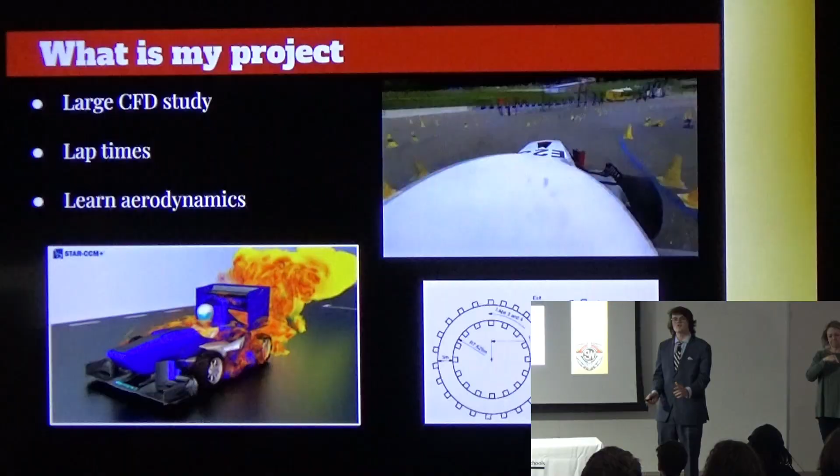A skid pad event is a simple figure 8 event where you take the track time of going around this figure 8 twice, and see what is your best time going around a circle 1 time. You average it out, and the best time is your overall score. That is what I'm going to be accomplishing.

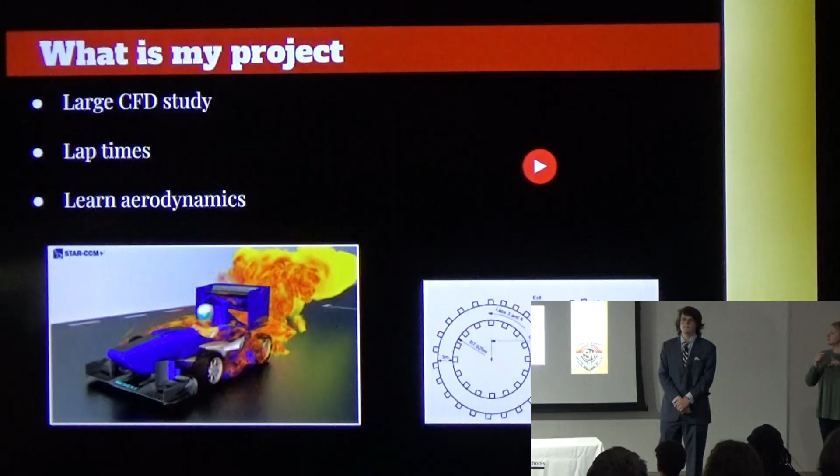And finally, I would also like to learn quite a bit about aerodynamics, as one of my goals in life is to become an aerodynamicist.

So, what are my project inspirations? What really inspired me to do this? Well, I've always loved racing, and I've always kind of been curious about aerodynamics myself. In fact, my car has a spoiler on it, and I've always kind of thought, how does that even work?

Learning aerodynamics kind of came naturally to me because I see it all around me, and I've always wondered how it worked. Secondly, I always wanted to join an FSAE. Now when I say always, I don't mean like Kyra, where he was 18 months old when he got into NASCAR.

I mean more like during high school. I've wanted to join an FSAE team since I started high school, as it is one of the best introductions into racing that you can get. So that's my second project inspiration.

Finally, most importantly, is being told not to by Mrs Lujan. I remember vividly walking out of my junior year on the final day and explaining to Mrs Lujan how I'm super excited to do a senior capstone project.

To which she asked, well, what do you want to do for your senior capstone? And I told her I wanted to make a go-kart. Well, this isn't quite a go-kart, but it's quite similar, and here we are.

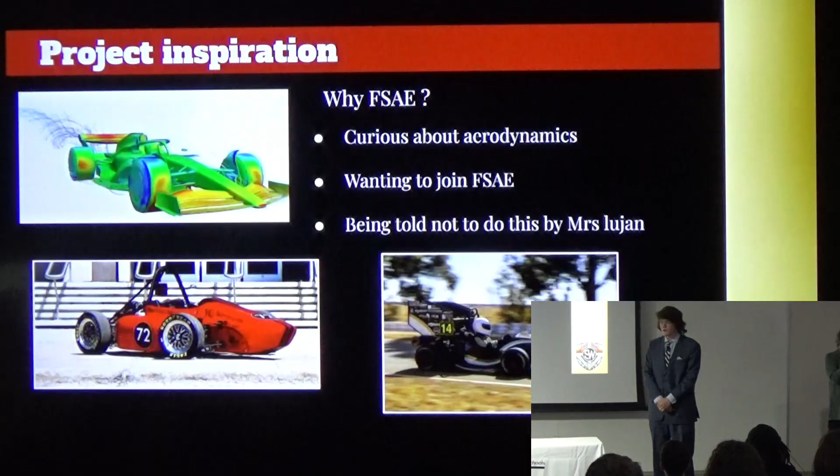So, another thing that's important to cover is exactly the engineering required to make something like this. I must cover these bases because it's important to know what you need to become to make accurate models for this. What you basically need to be to create an FSAE car is an aerodynamicist.

Unfortunately, I am not one. But what even is an aerodynamicist? An aerodynamicist is someone who studies the movement of air, the flow of air over objects. This could be trains, planes, boats, even buildings sometimes. The qualifications to become an aerodynamicist effectively sum up to being either a mechanical engineer or an aerospace engineer. Of course, you can be other forms of engineering, but these are the two most common.

Oftentimes you'd also find these guys in the wild working on pretty much anything racing. These guys love racing. However, there are quite a few aerodynamicists who work outside the field of racing, as we need aerodynamics for pretty much anything that moves.

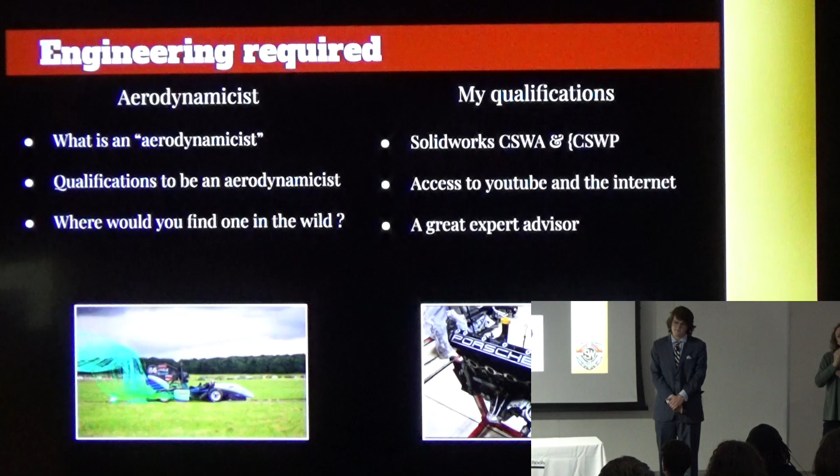Again, I am not an aerodynamicist, unfortunately. However, I do have some experience that allows me to get into this project. My first and most important being, I know SolidWorks pretty well. My SolidWorks experience allows me to model anything I need to model for this project.

Secondly, the most successful part is being able to access the internet and YouTube for my project. This has been crucial, as it's taught me basically everything I need to know, because unfortunately I don't have the money to hire my own tutoring team teaching aerodynamics. And finally, having a great advisor has been a massive help to this project.

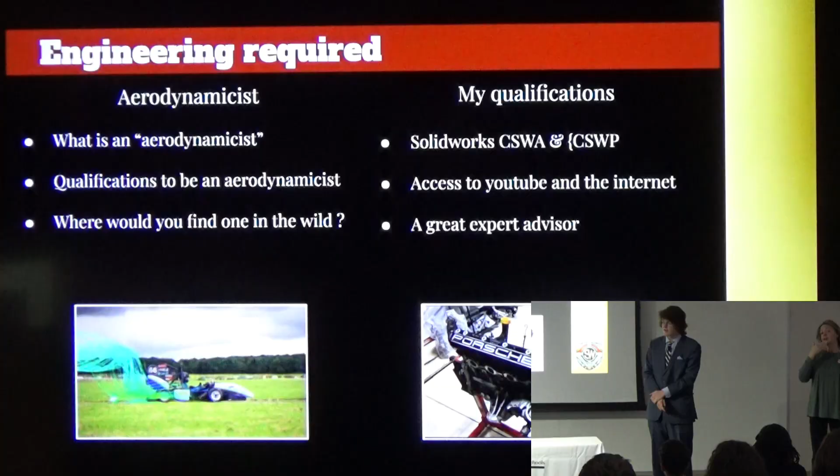So, to get through a final thing, my project objectives. Before we get into the actual project, I must go over what were my initial goals for this project. For starters, I wanted to create a full-scale FSAE.

I wanted to design something of my own rather than just taking a random race car off the internet, which was first what I was told to do. I would like to make it my own, to test it on my own terms.

Secondly, I'd like to kind of understand aerodynamics as it is. I'd like to get myself into the field of aerodynamics and really just have a grasp of it. I'd also like to use these aerodynamic connections to make connections with FSAE members.

Now, most FSAE teams you can just join without needing a requirement. However, the more connections I can make, the better, as it might be able to get me into maybe Formula 1 or Formula 2. Also, I would like to improve my skills with SolidWorks.

As Colton probably remembers, my skills starting off the year were pretty rusty. However, this project has helped me revitalize anything I've learned from SolidWorks and taught me quite a few new things about the program that I didn't know.

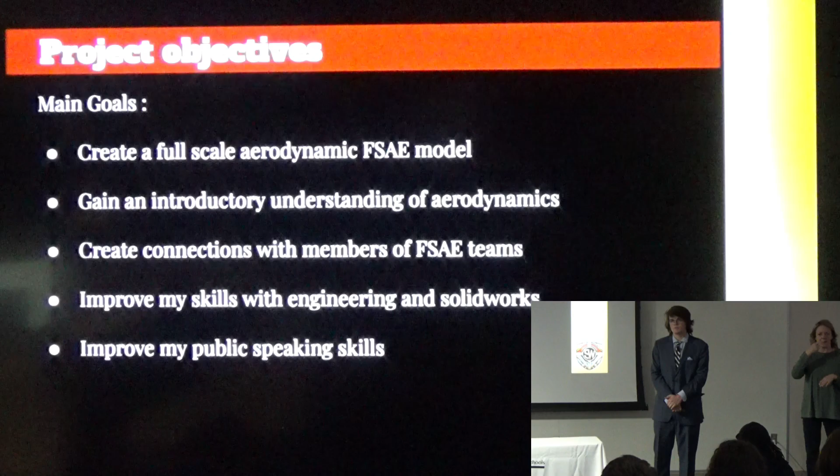Finally, I'd like to improve my public speaking skills. My public speaking skills, like some of the other guys mentioned, have been pretty lackluster. However, here we are, here we're doing it now.

Alright, so before we actually get into the main bulk of my project, I'd like to give you guys a little bit of a crash course on aerodynamics. Now, of course, I can't teach you everything about aerodynamics, but I can teach you the simple basics to help you understand my project better.

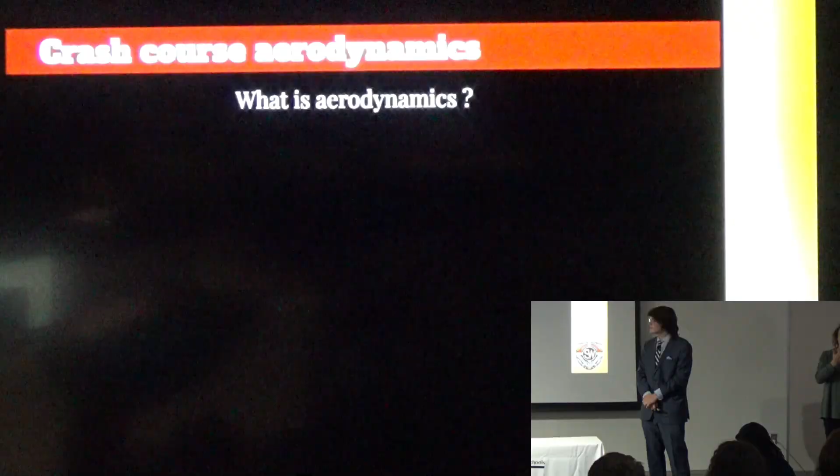These three simple basics I will be covering are the study of airflow, the principles behind this, and finally the effects behind the principles. So, starting with the study of airflow: what even is the study of airflow? As the name implies, it's the study of moving air.

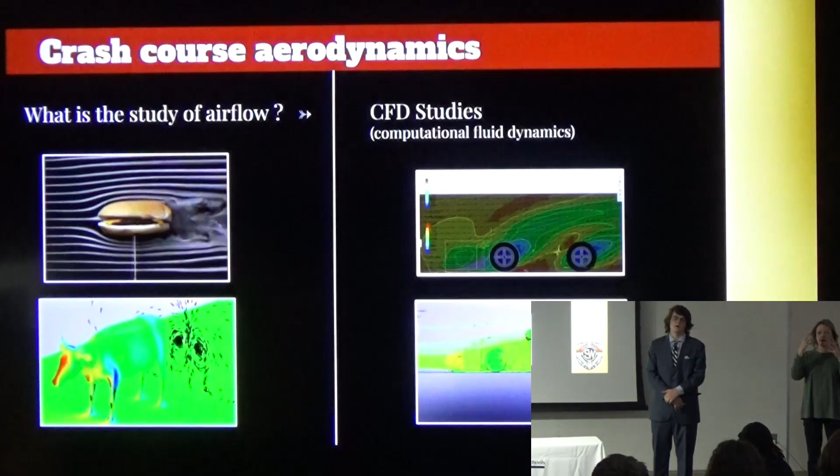Luckily, we are in modern times where we're able to use CFDs, where we're able to calculate all our airflow over computers. However, in older times, they would commonly use smoke airflow tests, and they would have to do lots and lots of math. We're in modern times, so I was luckily able to save myself some time not doing it.

Secondly, the principles. We're going to start with Bernoulli's principle, as it's probably the most important for this program. Bernoulli's principle essentially establishes that air is pressurized.

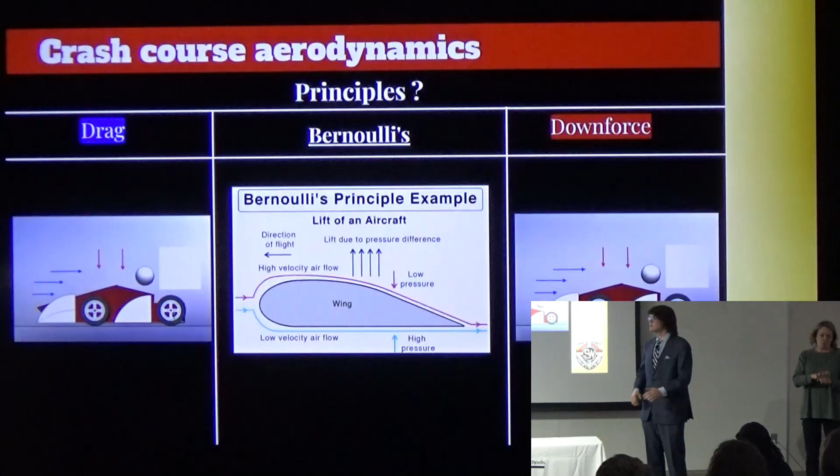We know that air likes to move around on top of and below objects. So, by using this, we can establish what creates lift and what creates downforce. The best way to think about it is air likes to stay at a constant state. If you increase the pressure of the air, well, it will push back on you.

And if you decrease the pressure of the air, it would like to pull back on that as the rest of the air tries to flood it. Using this understanding, we can create a simple wing, where low pressure pulls up on the wing, and high pressure pushes up from the bottom.

Flip this upside down, and you have downforce. Downforce is effectively lift, but upside down. Downforce is another subsidiary of Bernoulli's principle, and so is drag, which is why Bernoulli's principle is very important. Drag is effectively a perpendicular force of downforce. If we know what downforce is, we can know what drag is. Drag is like downforce, except it comes from the front and pulls from the back.

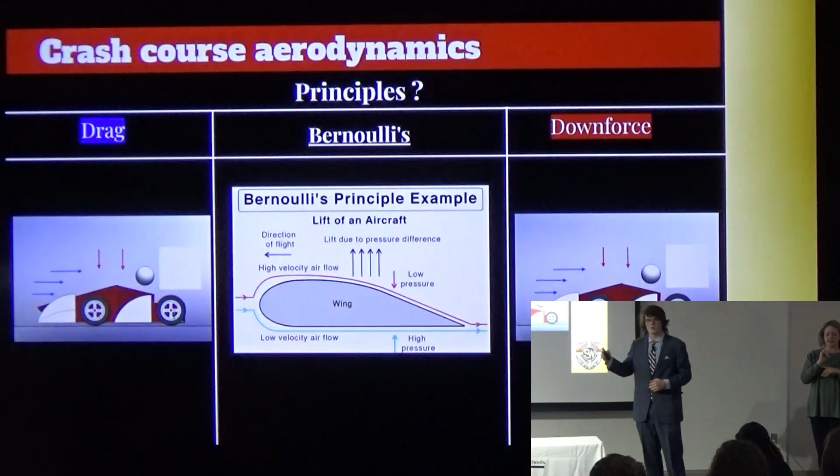Finally, we have our effects. Of course, there's plenty of effects to go over, but the three main effects I'd like you guys to know are the Coanda, Venturi, and ground effect. For starters, the Coanda effect basically establishes that air likes to stick with itself. It likes to be with its friends and kind of stay in a steady layer with itself.

So we know that if you put a wing through the air, rather than the air flinging off the wing like it's going off a ramp, it likes to go over the surface of the wing and hug that wing.

Second, we have the Venturi effect. The Venturi effect is only utilized a few times. However, it's important to know that the Venturi effect is what happens whenever you squeeze air into a tight space. Think of it like when you were a kid and you put your thumb over the end of the hose. The water would go super fast out of the hose because as you squeeze, the pressure decreases and the velocity increases. That is the Venturi effect.

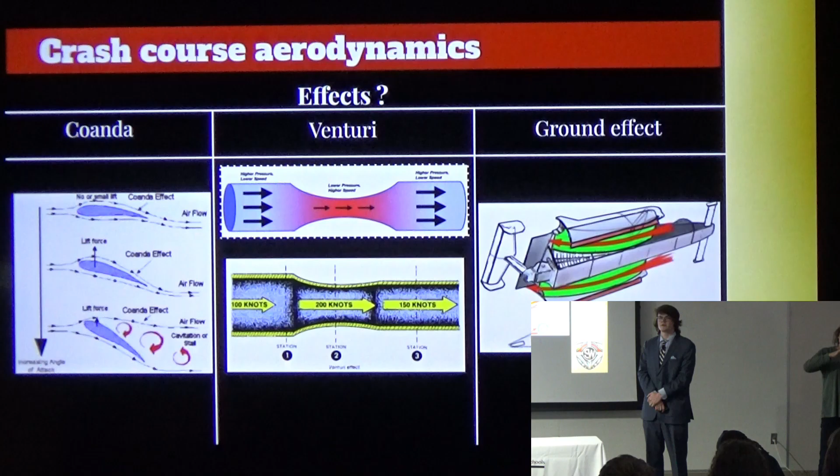And finally, the ground effect. Not to be mistaken with the airplane ground effect, the race car ground effect essentially combines both the Coanda effect and the Venturi effect. We know that if we can get the air moving fast and squeeze it together and then rapidly remove it from the bottom of the car, it will create a low pressure area, which will suck the car to the ground, allowing the car to have much better downforce. Effectively, we're trying to create a vacuum below the car.

Finally, one little quick tidbit I'd like you guys to know is a bit of slang, as I'll be using some of these terms. Our first word is wings. It's important to know this is a wing. This is not a wing. This is a spoiler. What a wing does is it actively works to create downforce, whereas a spoiler actively works to go against lift. So it's important to know this is a wing, that's not.

Second, track/wheelbase. For all intents and purposes for the rest of this project, just assume this is length and width of the car. And finally, aero package. Aero package simply means the wings and body of the car. It's anything that generates downforce.

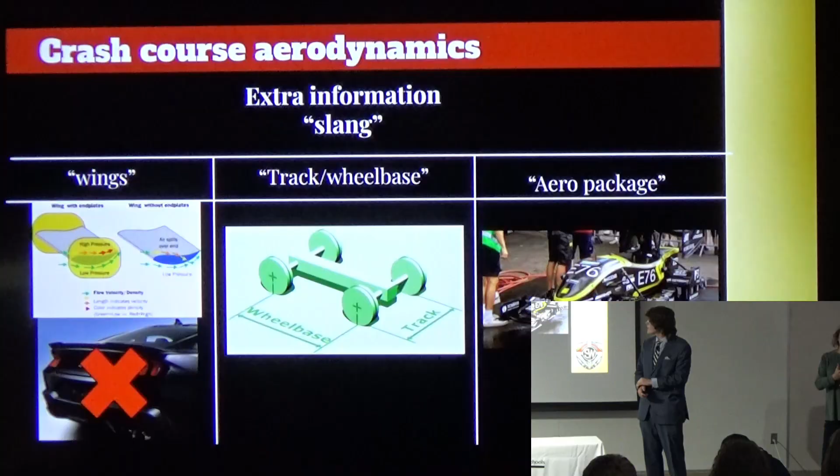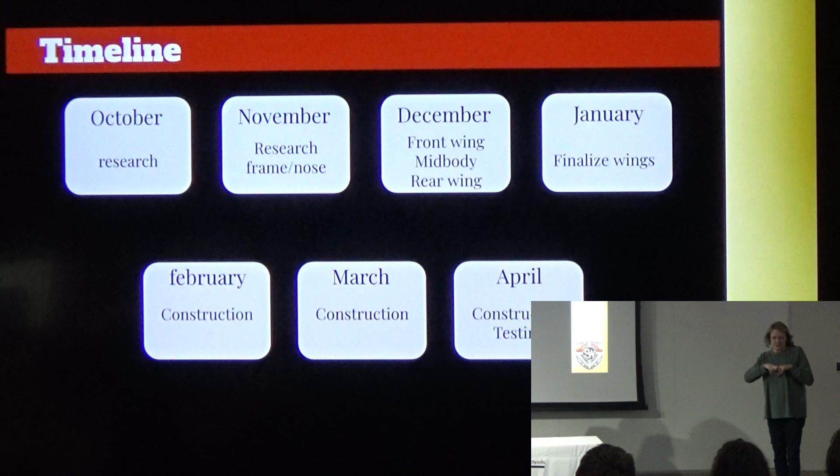Moving on to the beginning of my project, I'd like to introduce you guys to my lovely initial timeline. I was quite overambitious creating this timeline, and I decided I was going to make a full-scale model, which, unfortunately, I never ended up making. As you guys can tell, I probably wouldn't be able to fit inside this model.

However, I did end up beginning with my research, but we will come back to this, as it essentially establishes what I began with the 3D modeling and then finished with construction. To get us through this, I'm going to go ahead and add a timeline on the side. This way you can see the progression of time as I go through my project.

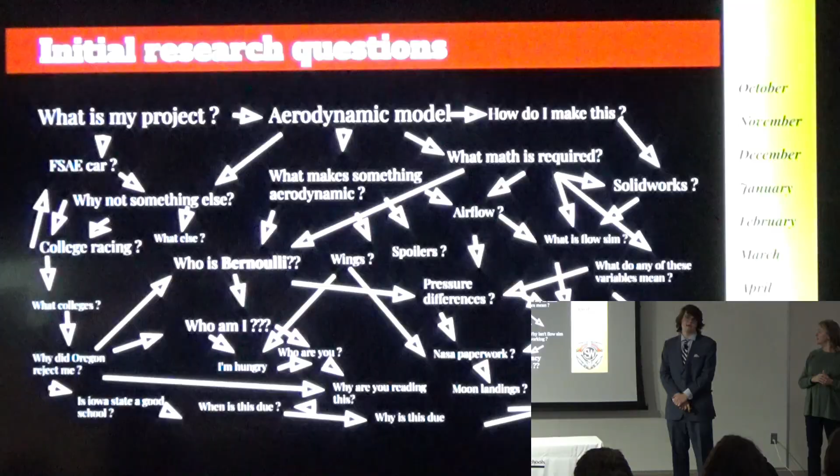Starting off, what is my research for this project? Research is important to know, and research is important to do for this project. However, as I got into the research, I found it to be a little confusing. It got kind of complicated kind of fast. Aerodynamics is a much more complex field than I ever thought it would be. So I went ahead and simplified a few things.

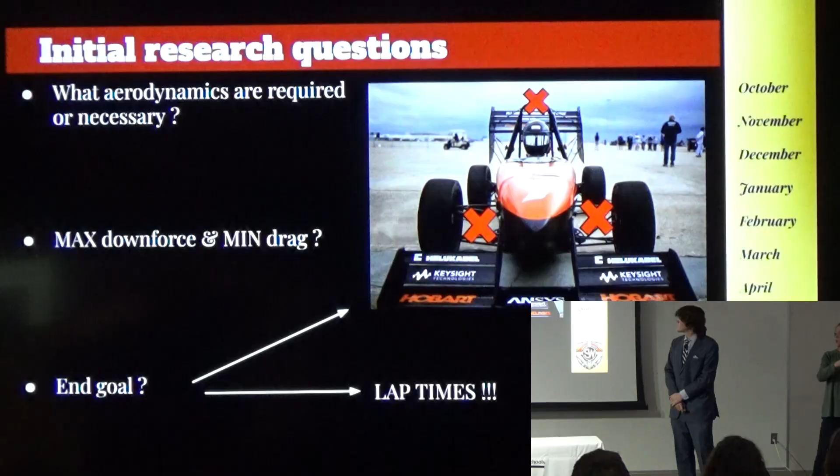I decided my three main questions to ask myself for research are: what are the required aerodynamics, and what is necessary for this car? Some of the required aerodynamics are simply just for wings. We know with the wings we can generate downforce and all the forces required to study it. However, some of the non-required stuff, such as the steering columns, the suspension, and other outboard components, do not generate downforce, unfortunately. However, they do create a lot of drag, and they do waste a lot of time 3D modeling.

To save myself some time modeling and generating, we're going to look at max downforce with min drag. Of course, the most important part of figuring out this project is figuring out how much downforce my car could produce.

Unfortunately, I can't just make a wing that creates thousands of newtons of downforce, because that would result in a lot of drag, and the car would end up being slow anyways. So I need to find a nice little medium between it.

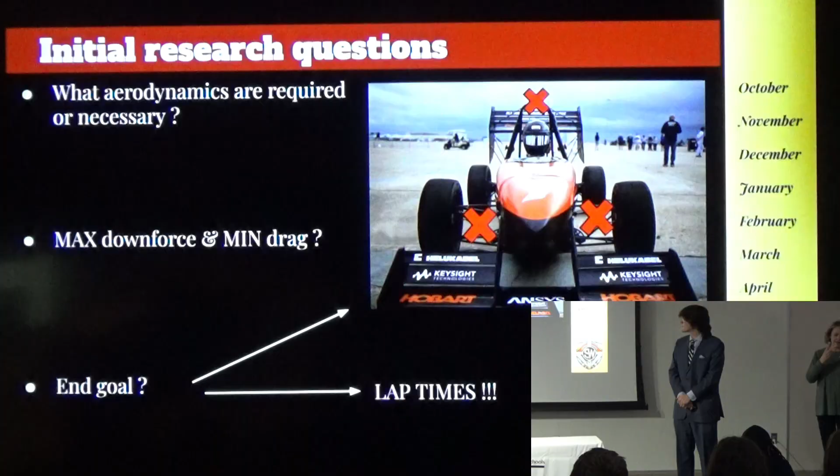And finally, what is the end goal? Well, as described earlier, my end goal is to make a full-scale FSAE model and calculate the lap times behind it. That ended up taking a month off my time, so we're still pretty on track.

Secondly, I decided to start with some bare-bone basics. If I'm going to get this project started and create some 3D modeling for this project, I might as well do some basic stuff. So I started with a simple shell, doing the wheelbase, and doing a regulation layout — the layout required by FSAE within their rule book, just laying out where stuff needs to be.

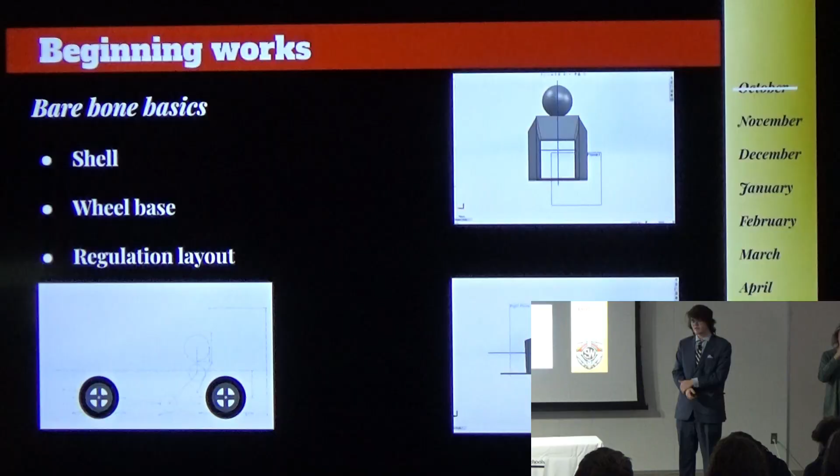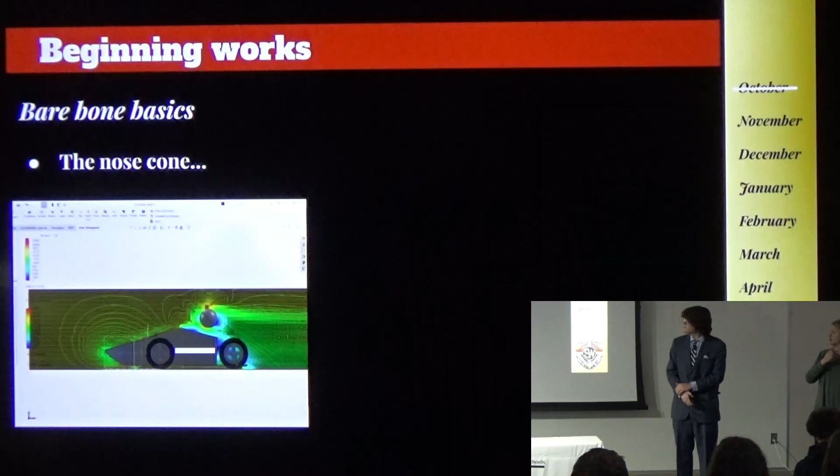Then I decided, since I'm ahead of time, I might as well start on some aerodynamic devices. The first aerodynamic device I started with, I thought would be the simplest. Unfortunately, it was not. The nose cone ended up being one of the most complex aerodynamic devices I've built, because I really didn't know what I was doing when I was creating it.

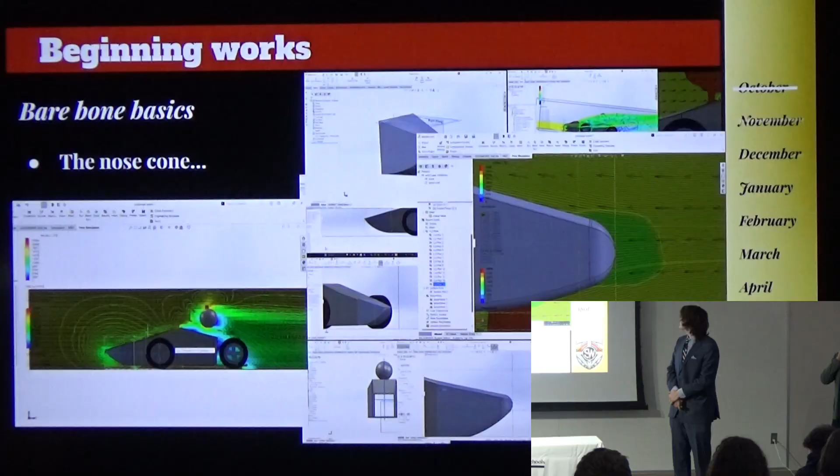The way I decided to create it was, instead of doing a simple model and correcting the issues with it, I decided to create roughly 20 models and see if I could just make a model that would be perfect off the cuff. Granted, this didn't work at all, and this chewed into another 2 months of my time.

So I finally found a nose cone that did actually fit my project, and I thought it looked pretty great. In fact, I had quite a few people look at it and say that would work, and some of my advisors thought it would work too.

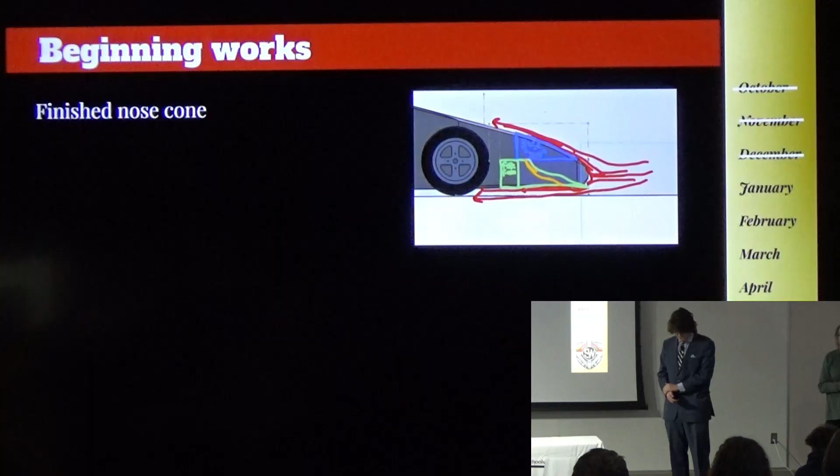However, I went back through all my research, and it turns out this nose cone would be more effective upside down. Really unfortunate. So I went back to the drawing board and created yet another nose cone — the lovely nose cone Mark 20. This ate another month of my time.

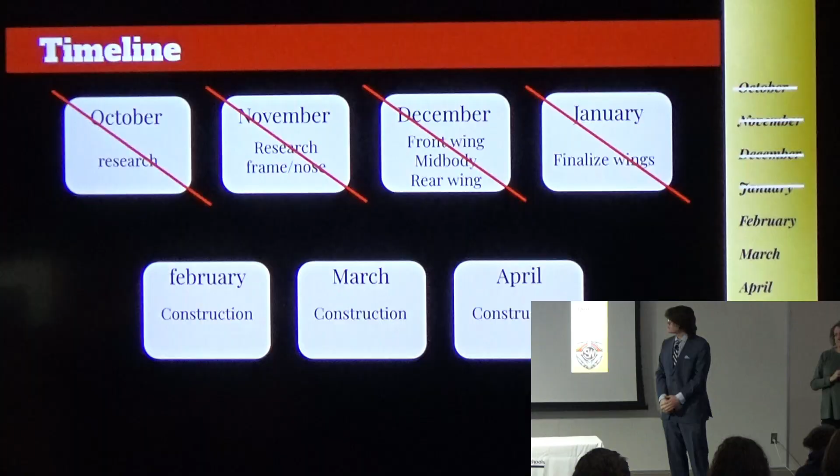So I had to go back and re-look at my timeline, because by this point I had gone through 4 months of my timeline, and I'd only really covered 2. So I was way off track, and I needed to reissue how I would do my project from now on.

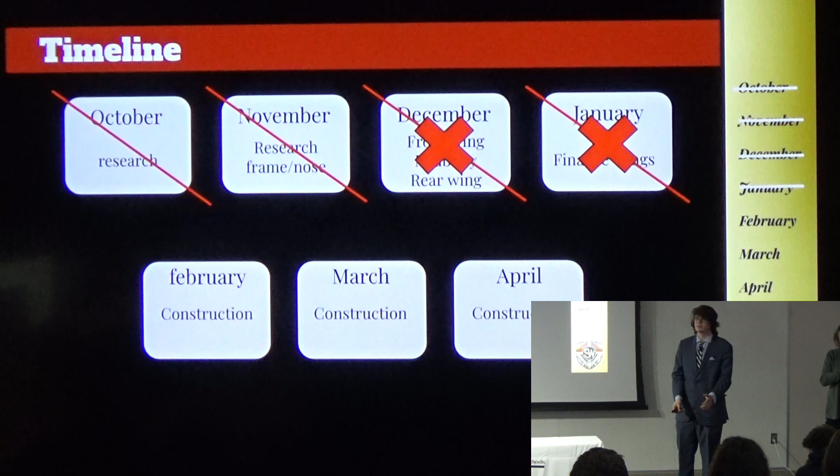So moving forward, I decided to get rid of the construction and instead focus solely on 3D modeling and lap times, as having a physical model is not nearly as important as having a working model.

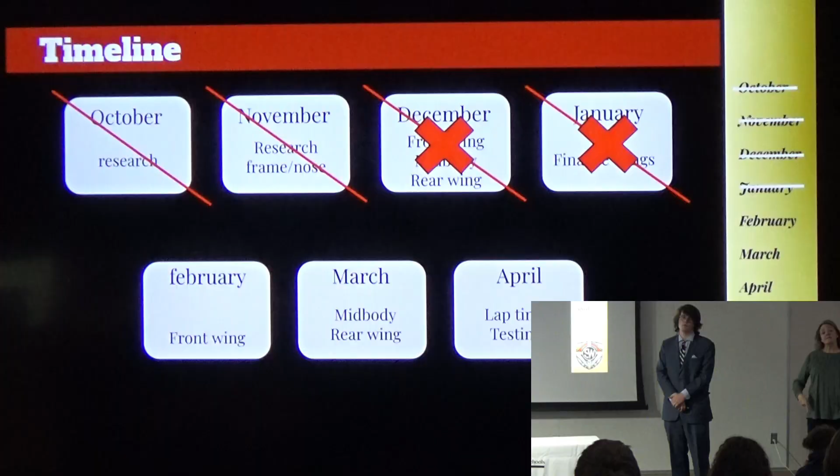So to begin my next stages, I also decided to increase the amount of time I could use for each wing. Instead of just trying to speed through it and make a model, I decided to make one simple model and refine it as much as possible.

This refining effectively sped up the time process for getting through the models, because it takes a lot less time to make one model and make it better than it does to make 20 models and see which one works best.

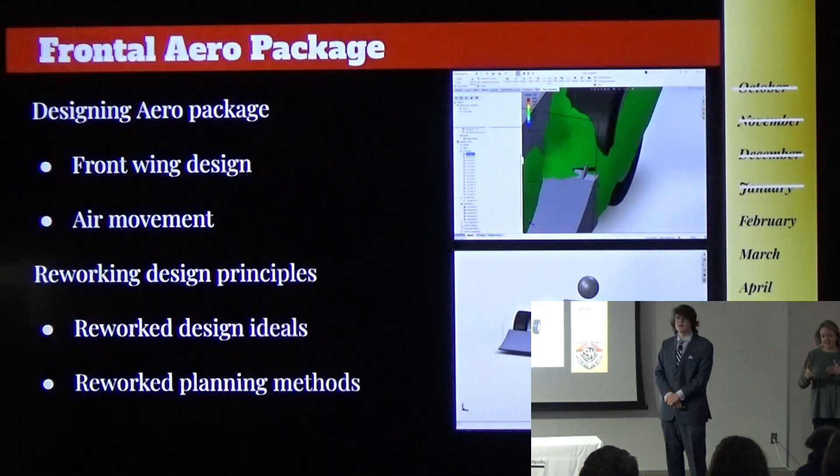Of course, I had to start with the front wing, as the front wing is the most important model for a car. The front wing is the first thing to move air over the car, and if you perfect your front wing, you can easily perfect the rest of the car.

So for the front wing design, I decided again to do the incremental design. I started with a simple ramp and kept improving and improving. From this improvement, one of the top designs I found that worked was a staggered cascade design.

A staggered cascade design is simply stacking wings on top of each other. Why would we do this? Well, as established earlier, we have drag, and one of the ways to alleviate that drag is by letting some of the air through.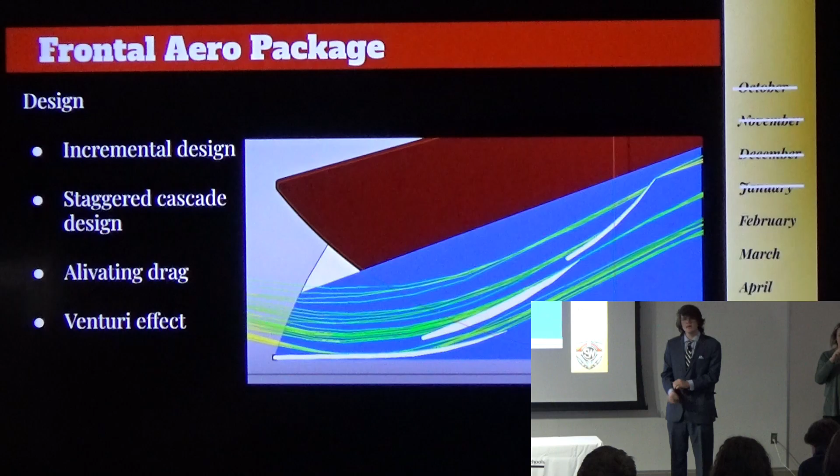So as you can see, by letting the air through, the air still moves steadily, but it also still goes up with the wing. If we were to just do a simple wing with no holes in it, the wing would probably create a large amount of drag, as the vacuum created behind it would pull the whole front end backwards.

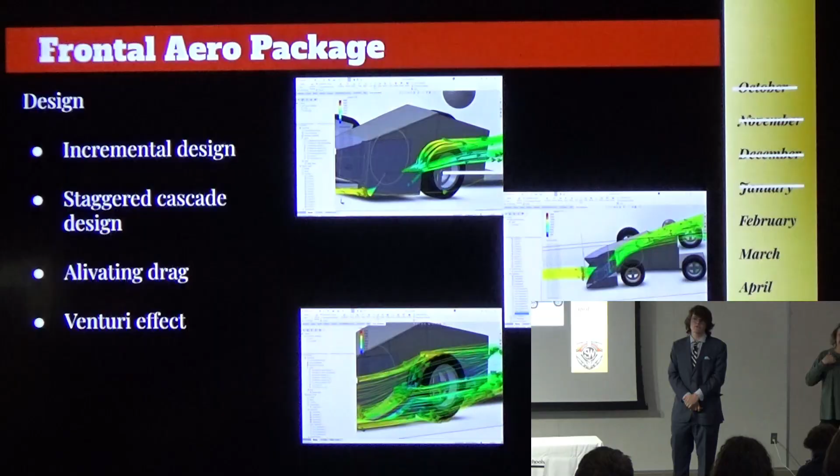Now, another part of alleviating this drag was dealing with the tires. The tires were one of the hardest parts to figure out. Alleviating the drag created by the tires is an issue because due to the rule book's limitations, I cannot create a wing that goes over the top of the tires or create a wing high enough to fling the air over the top of the tires.

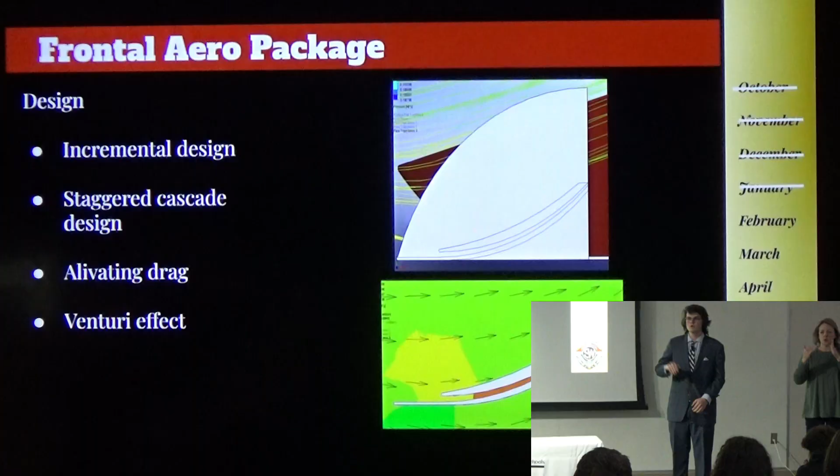So I decided to use the Venturi effect. By utilizing the Venturi effect, I created a small inlet on the bottom of my outer wing that allowed air to speed up and pressurize as it was exiting towards the tire. Then I increased the height at which this air exited, so it had high pressure air going almost vertical into another stream of air. This high pressure air was able to push the air over the top of the tire and eliminate any drag from the tire. This was the final result for the wing, which ended up turning out pretty great.

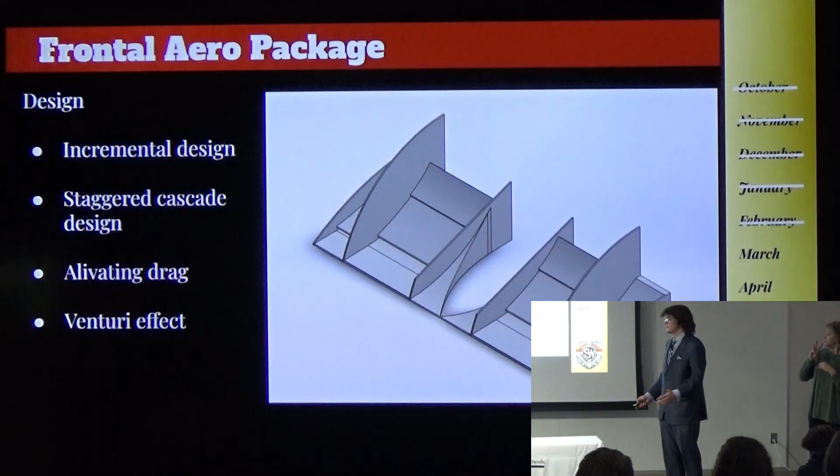This ate one more month of my time. We're getting pretty close here.

So next I had to deal with the mid-body. The mid-body is most likely one of the most simplistic designs you can do for this, as unfortunately due to the rules and regulations, you can't really make a whole lot with the mid-body. There's a lot of height restrictions and space restrictions with both the wheels and how you design it. So I decided to focus on two main things.

One, I decided to focus on seeing how much I can introduce the ground effect with the rules allowed. And I also decided to see how much drag I could reduce by adding a wing over the top.

Now, the ground effect—unfortunately I couldn't do it like most race cars do, where they use a spoiler to get the ground effect to go up, as it just exists as a flat blade. So my attempt to do ground effect was to try to get the air to go as fast as possible underneath the car by using the nose cone shape, and then having that air separate out from the sides of the tires, which is why the wings here are sticking much further out. That way the air sort of peels off the rest of the car.

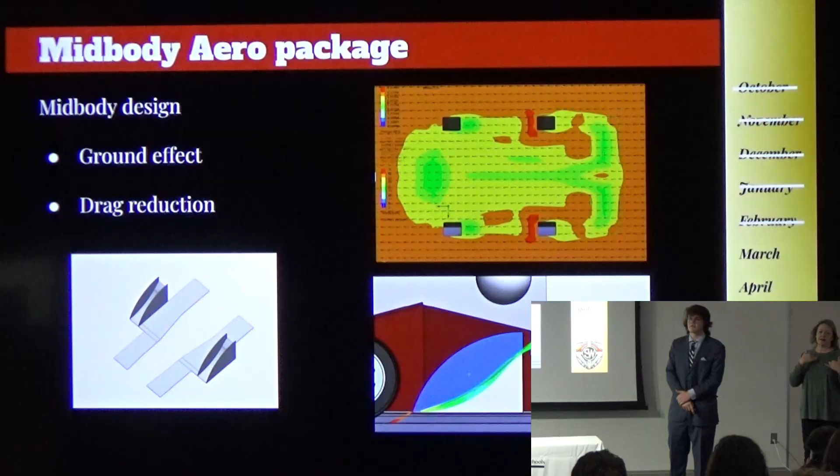And of course, drag reduction. This time I actually had a little bit more height, so I decided to make a simple wing just to let the air go smoothly over the top of the tire so I wouldn't have to worry about the air.

Finally, the last important part about my project: the rear wing design. Now, the rear wing design is pretty complex as well, as you have to deal with the driver. Unfortunately, you don't just get steady airflow, but rather you get a lot of turbulent flow. So you have to make an aggressive design for your rear wing.

The best way to do this is to maximize the size and increase the pitch of the wings, which allows you to increase the aerodynamic downforce on this wing. Now, of course, I had to go with the staggered cascade design again, as it proved the most effective with the front wing, so I decided to reuse it rather than see if anything else worked better. Again, the staggered cascade design is proven.

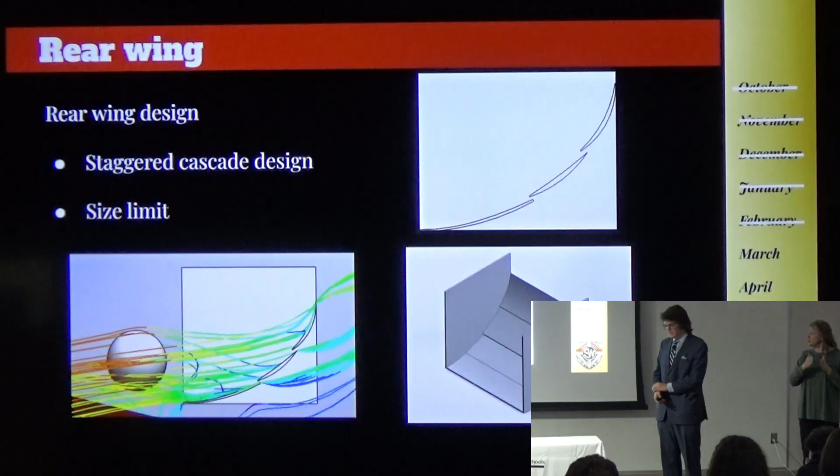And secondly, the design limitation. As I explained, I have certain limits from the rule book. The rule book likes to mess everything up on this project. So I really just could make it as big as I possibly could to make as much downforce. However, I couldn't make it that wide, so it ended up looking kind of goofy. This ate one more month off my time.

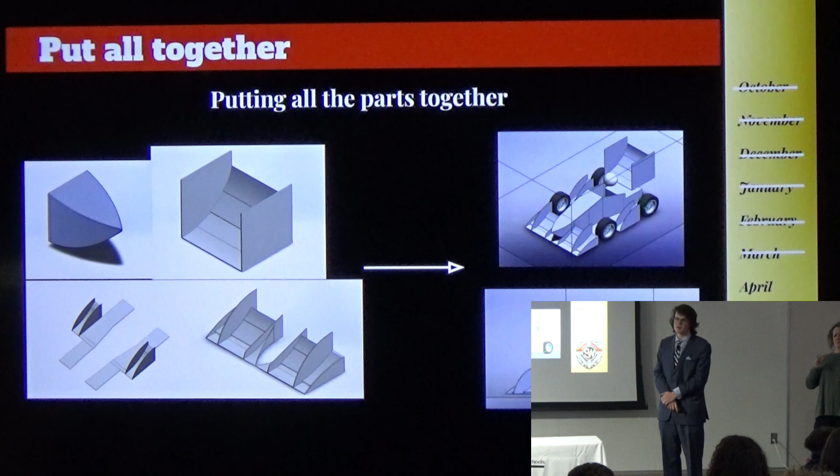Finally, I had all my parts together, so I decided to put them all together, and I kind of sat there and looked at it. And I thought, well, I think it's missing something. So I decided to color it. I thought I might as well make it pretty. And overall, it turned out pretty great for what it's worth.

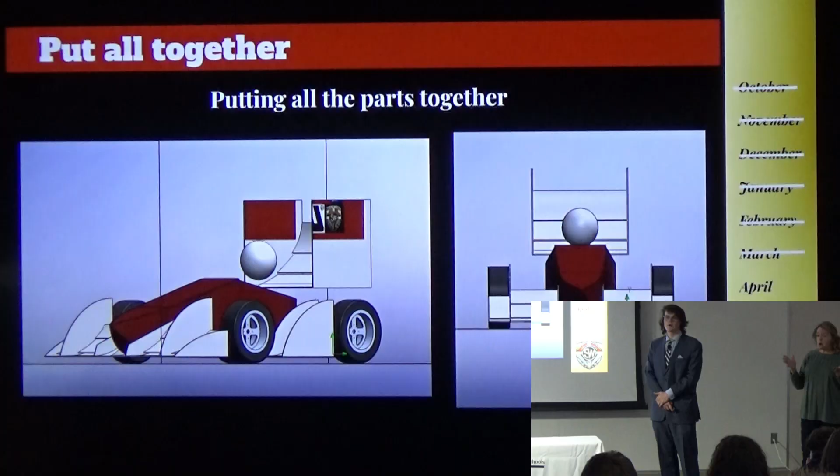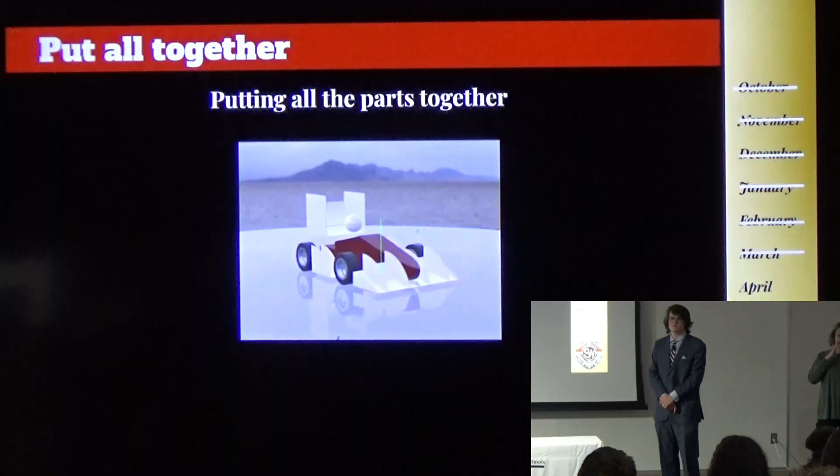This car was a lot better than how I thought it would look going into the year, and definitely a lot better than how I thought it would work when I was stressing about time halfway through the year, when I wasted so much time on a nose cone. Luckily, it turned out pretty well.

Now, for the final thing, of course, I had to go over the math. The math was the only way I could get the lap times, as I can't just simulate a car going around a corner without doing any math.

Now, the way I did this math initially was I asked my expert advisor to provide me a simple formula to create this math. However, he did not provide me a simple formula, and the non-simple formula he provided was a little unrealistic, and it never really worked. Some of the original times I was given were faster than the speed of light, which unfortunately is not very realistic for my car, and it caused me hours and hours of delay trying to figure out how to get his formula to work.

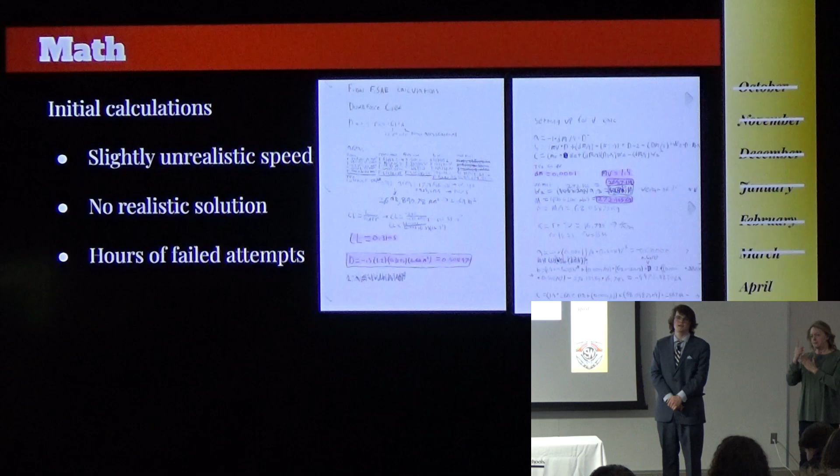Finally, I sort of gave up on his formula and decided I can make my own formula. The formula I decided to make was a simple lateral force formula. I knew that if I want the car to go around at the maximum speed possible, it has to be achieving the most amount of lateral force possible. Therefore, I rewrote the entire formula, solved for a number, and solved for velocity. Finally, I was given a more reasonable number of 11.84 meters per second.

Now this time I used to find the distance traveled, and then I calculated how fast that 11.84 meters per second would get me around the track. Initially I thought, wow, I've made an incredible product, because this timing ended at 5.008 seconds around one track length, and that would be a world record by quite a few seconds.

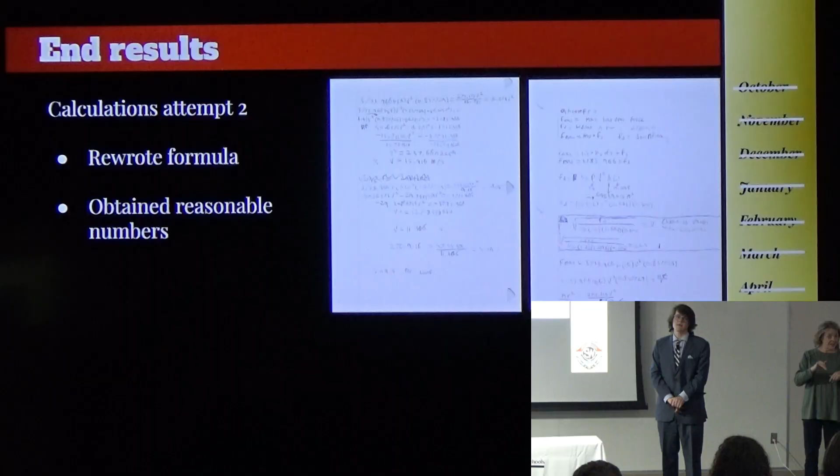Unfortunately, I forgot to consider something. I forgot that my car does have outboard components, which do create drag. Therefore, to create a more realistic model, I decided to add drag to the car and add half a second to my car to give it a more realistic time. This more realistic time ended up being 5.5 seconds, which landed me closer to 30th place.

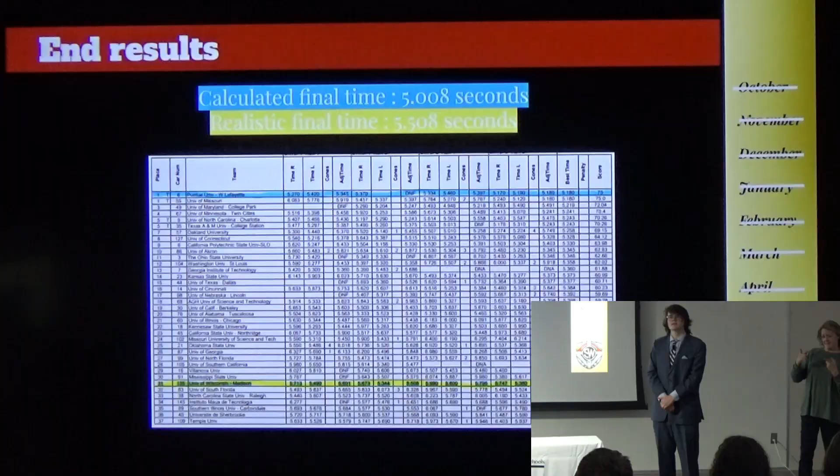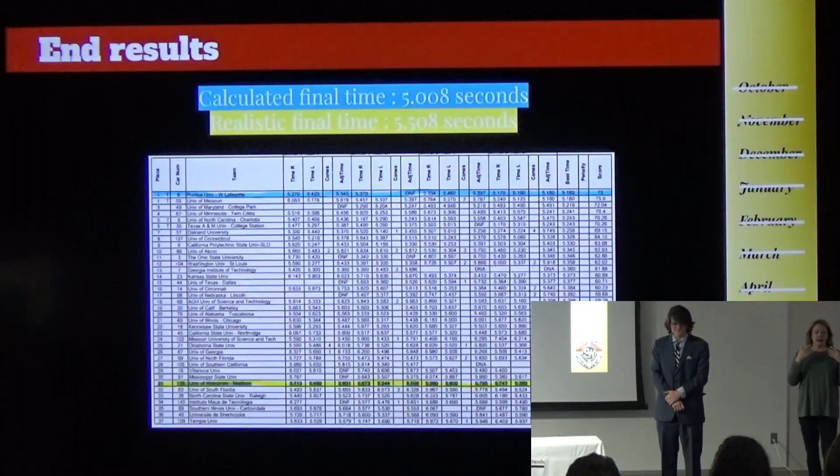This 30th place, of course, is not as great as some might think, but for me this is a huge accomplishment, as even getting 30th place within this event shows that I can compete with actual colleges, where those colleges have teams of 10 to 20 people working on aerodynamics who all know how to use aerodynamics, where I had to teach myself how to do aerodynamics, model the car myself, and also create the aerodynamic calculations myself. So with that, I deemed my project a massive success, eating up my final month and getting rid of that time limit.

Oh no, I'm just kidding. I finished with my bibliography, and that's it. Any questions?

Is the person going to add drag, and how is it going to affect the aerodynamics? The person sitting in the car will add a bit of drag, and the most important aerodynamic effect they have is they cause a lot of turbulent air to hit the wing. However, the drag they create is pretty negligible to the time, as they are not nearly as big as the rest of the car.

The person I modeled for this was just a simple sphere, which after consulting my expert advisor, he agreed that a simple sphere would model perfectly for what I need. So effectively, a person would add a bit of drag and would affect the aerodynamics a bit, but not too much.

So I know that SolidWorks and Onshape are both capable of doing simulations where you're able to simulate drag and the total force you have over a certain amount of time. Did you run the simulations?

I ran the simulations to garner the downforce. However, for some reason, SolidWorks refused to give me a drag calculation, as it kept giving me drag numbers that were kind of unrealistic. Sometimes it would give me numbers in the couple of hundreds, and sometimes it would say your drag is 27 newtons. I tried and tried and tried to get SolidWorks to work with me, but for some reason it threw a fit every time and just gave me a random number for drag.